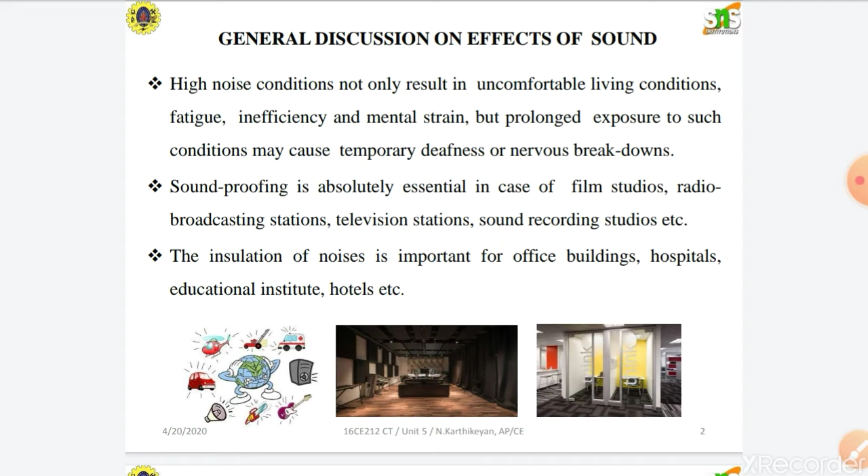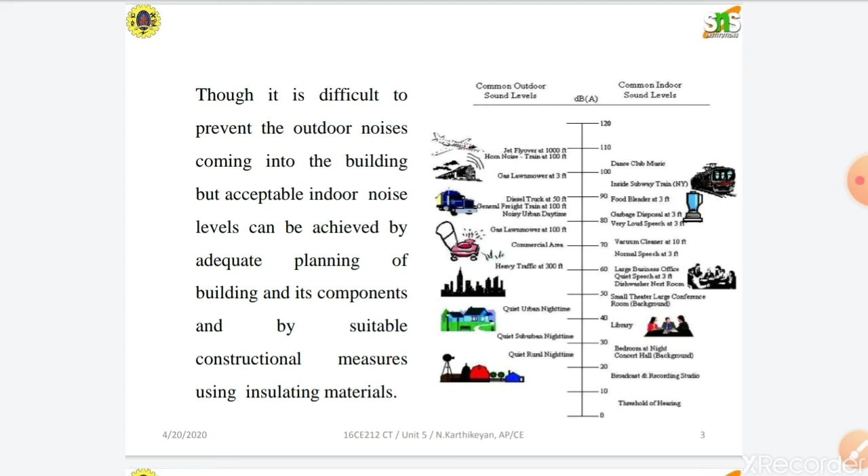That should be avoided. It is very difficult to prevent outdoor noise, but indoor noise can be achieved through adequate planning of components with suitable construction measures.

Noise is generally classified into two types: outdoor noise and indoor noise. Outdoor noise has its source of origin outside the room or building, such as traffic, railway, aeroplanes, loudspeakers, etc.

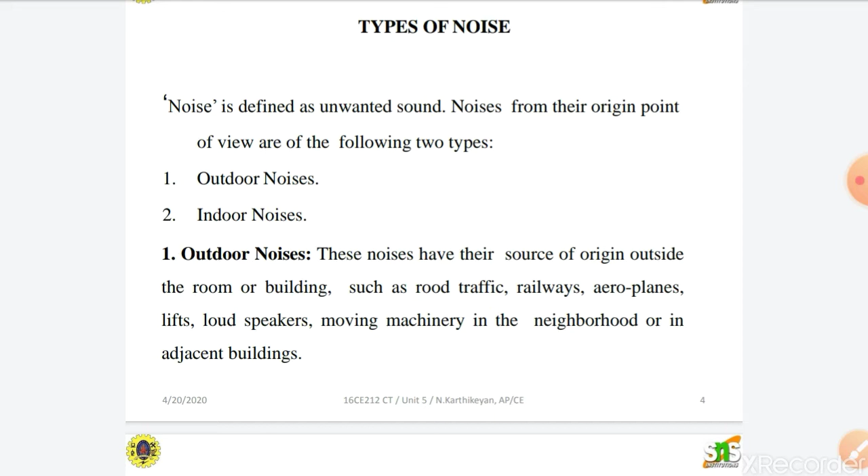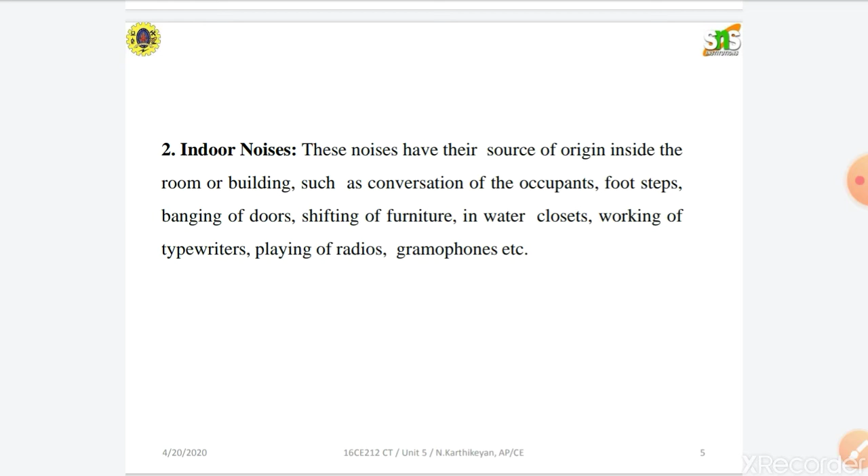The next one is indoor noise, coming from a source of origin inside the room or building itself. It may be due to occupants, footsteps, banging of doors, shifting of furniture, flushing of water closets, typewriting sounds, or even telephone ringing, which is also one type of interior noise.

These noises are also classified into two types based on the analysis of the sound insulation problem: airborne noise or sound, and structural borne noise or impact noise. Airborne noise is generated in the air and transmitted through air directly to the human ear.

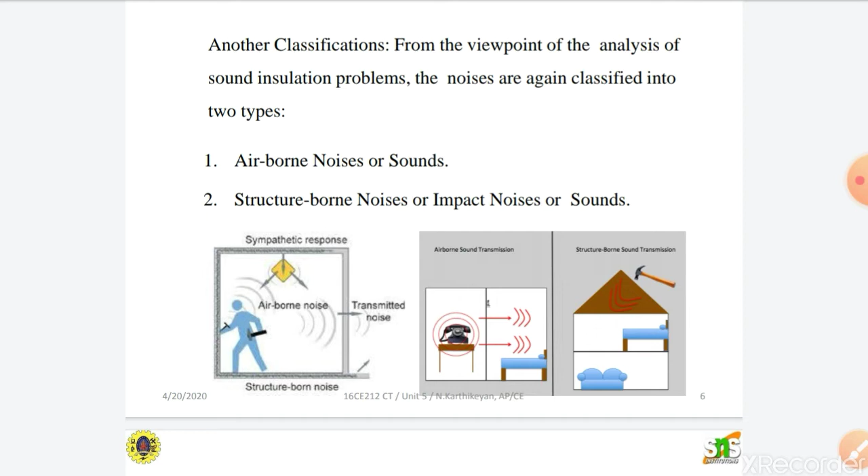This type of sound travels from one part to another through small gaps or openings, or by vibration of a portion of the wall or doors. The second one is structural borne noise, which originates and progresses in the building structure. It is caused by impact or transmitted as airborne noise.

We can see in the figure that airborne sound transmission is easily understood through the wall; while ringing the phone in some other room we can hear it in the bedroom itself, as the waves pass through porous media or partition walls. Either the neighbor hitting the wall, drilling the wall, putting a nail in, or hitting the wall with a hammer will create structural borne sound, which we can observe through vibration or transmission.

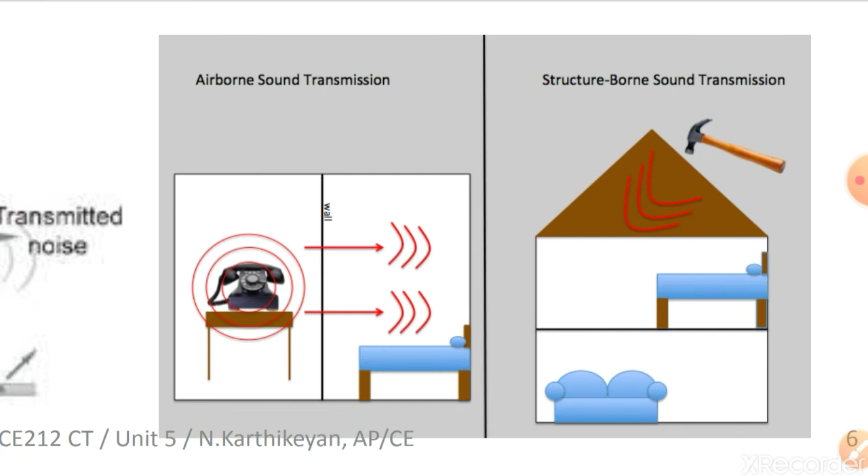So the transmission of noise can be classified into three types: through air, through structural members, and vibration of structural members. The first one, through air, is the most common and important.

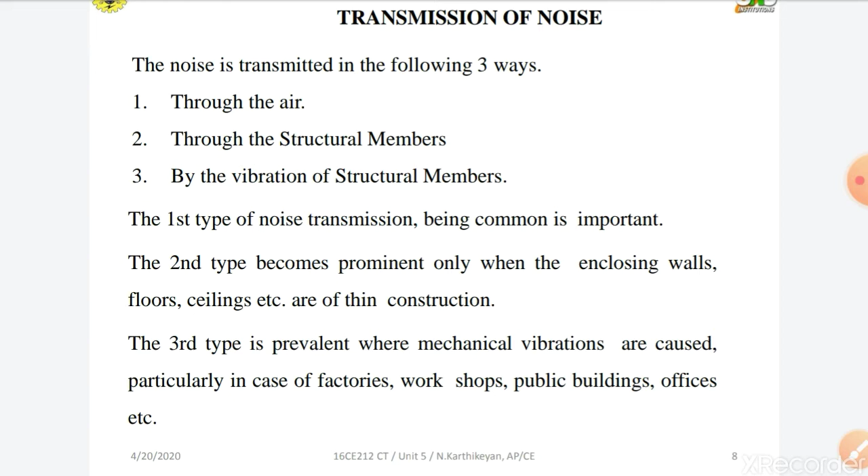The second one is through structural members, which becomes prominent only when the enclosing walls, floors, ceilings, etc. are of thin construction. In the case of office buildings or shops, we can prevent this. The third one is caused by mechanical vibrations, which may be prevented by thick wall construction.

We have already seen that sound insulation is entirely different from sound absorption. Sound absorption is the prevention of reflection of the sound waves, but sound insulation is the prevention of transmission of the sound.

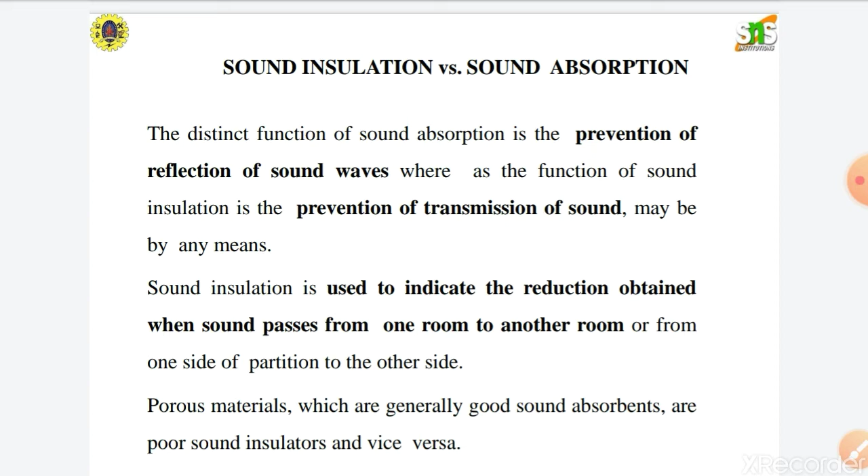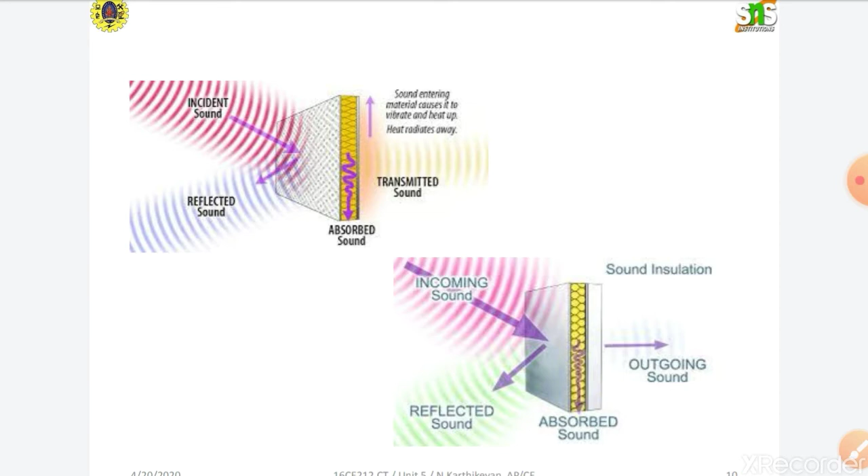If you use porous material for sound insulation or sound absorption, it is generally good in sound absorption but poor in sound insulation. If you use solid material, it is good in sound insulation but poor in sound absorption.

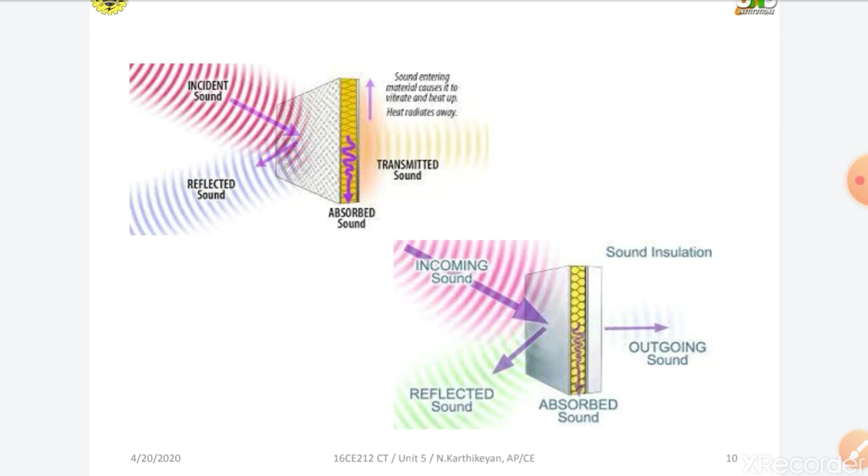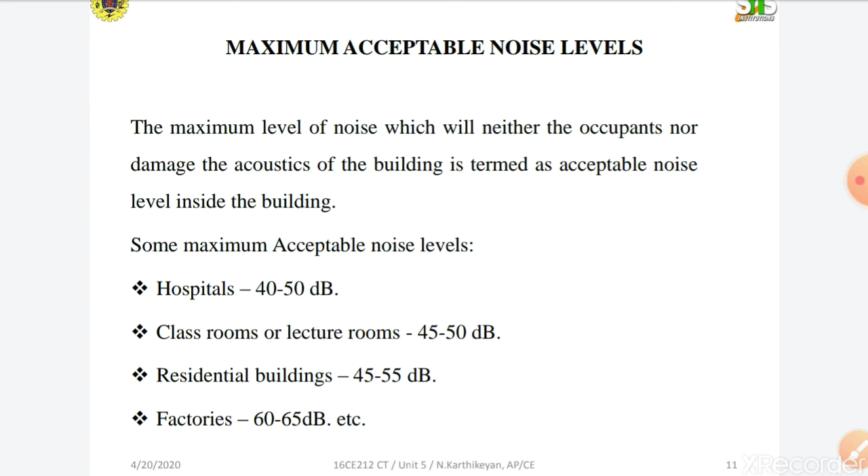The maximum acceptable noise level is described by authorities for any kind of occupants or building, and should have these limits. Maximum acceptable noise level for a hospital is 40 to 50 decibels. For classrooms, lecture rooms, or seminar halls, 45 to 50 decibels. For residential buildings, 45 to 55 decibels. For factories, a maximum of 60 to 65 decibels a day.

Noise control and sound insulation is based on Indian standards, which differ for different cases. As per Indian Code 1952 and 1962, limits for various kinds of buildings are given.

For houses or flats, the range is about 40 decibels. Between one room and another room in the same house or flat, it should be at 30 decibels. Between lecture rooms near to each other, it is 40 decibels. Between two wards in a hospital, it is about 30 decibels. For more details, we can refer to the above code.

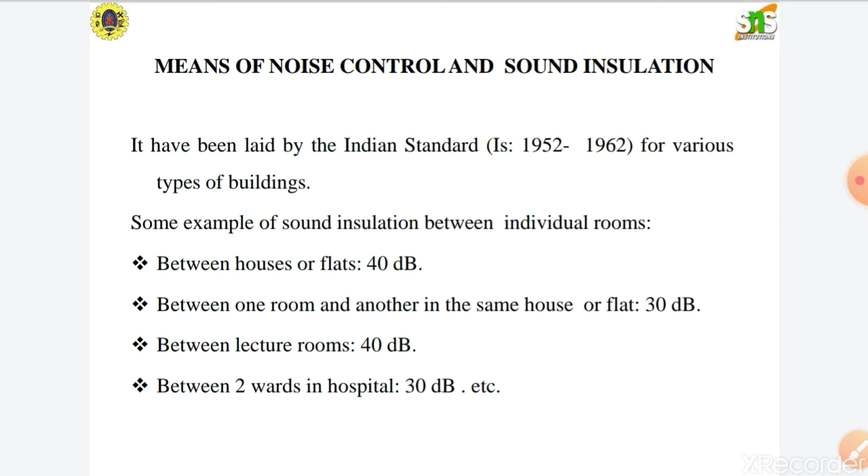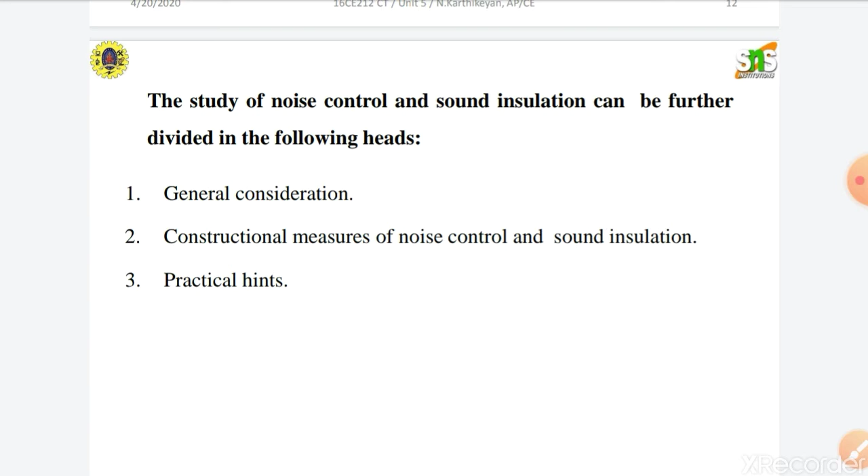The study of noise control and sound insulation can be further divided into the following heads: general consideration, constructional measures of noise control and sound insulation, and practical hints.

Under general considerations, we must first consider airborne noise and isolate it at the source itself. If we isolate airborne noise at the source itself, we will avoid the maximum amount of problems. For this purpose, we have the following methods.

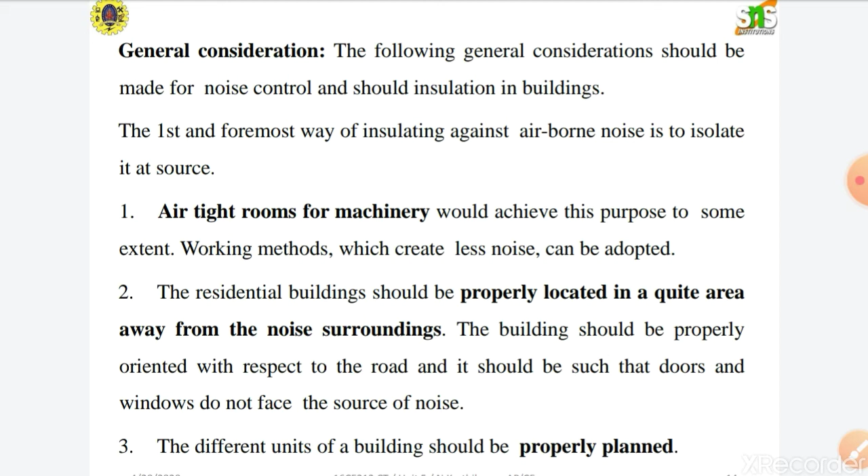The first method is an airtight room for machinery. If machinery creates more sound compared to others, it should be arrested at the source itself, through the working method, so that less noise is created. Regular maintenance and prevention of noise using springs, cork, or rubber should be done to avoid noise.

In the case of residential buildings, if properly located in a quiet area away from noisy surroundings, that is also good, since we are avoiding noise at the source. For this purpose, we should arrange the building considering its orientation with respect to the road, such that windows do not face the source of the noise. If we avoid providing doors or windows towards the source of noise, we can prevent the noise.

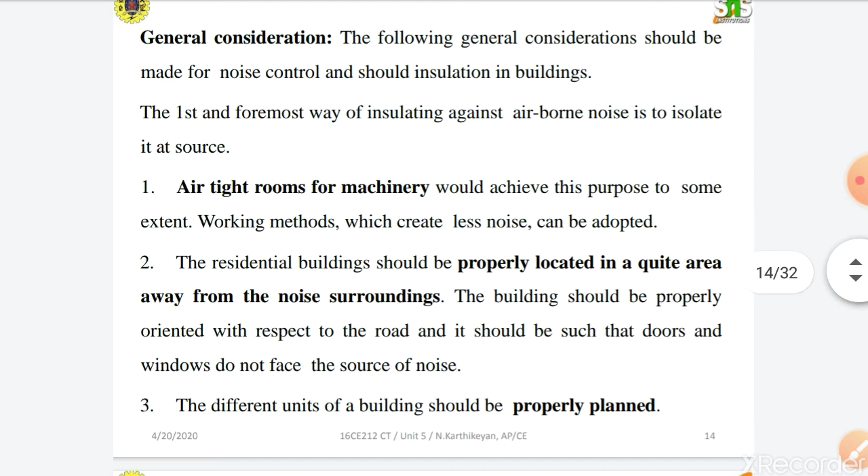If the building units are properly arranged or planned, we can achieve soundproof or sound insulated rooms. Provision of furnishing materials and lining of walls and ceilings can be done with air-filled materials, which will reduce the noise level to a great extent.

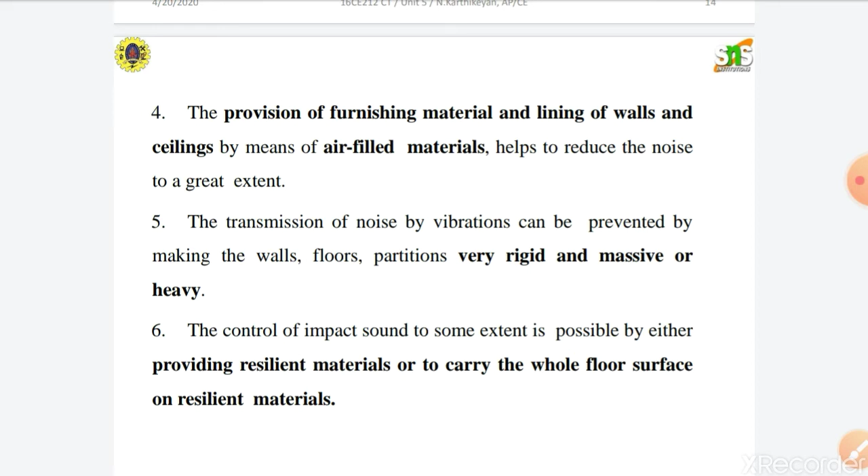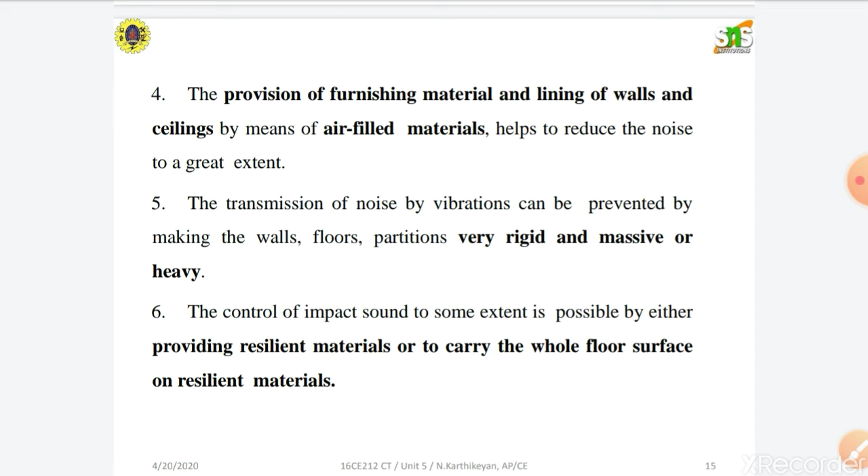Transmission of noise by vibrations can be prevented by thick walls, floors, and partition walls that are rigid and massive or heavy structures. The impact of sound can, to some extent, be reduced by providing resilient materials such as woolen materials. If the resilient material is thick, sound absorption is more; if it is very flexible and thin, the sound absorption or insulation is much less.

Structure-borne noise or sound can be prevented by introducing discontinuities in the path of vibrating waves, using sound absorbing material. We can also use personal protective devices such as earplugs and headphones, which can reduce noise by up to 20 to 30 decibels.

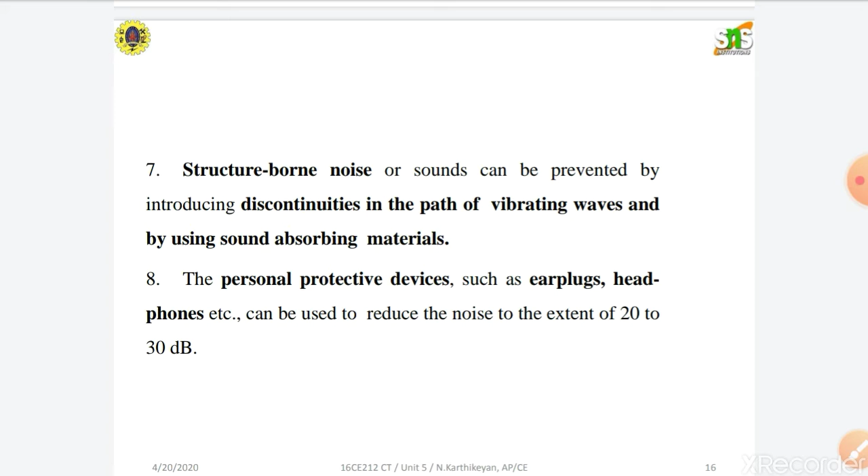But nowadays it is a fashion to use headphones to listen to songs, and this is also creating what we can call ear pollution. It will destroy the ear if used 24/7.

Some people are always hearing songs loudly—that causes external noise. We can control noise by the following ways.

We can control noise through walls and partitions, floors and ceilings, windows and doors, insulating sanitary fittings, and machine mounting or insulation of machineries. Let's see one by one.

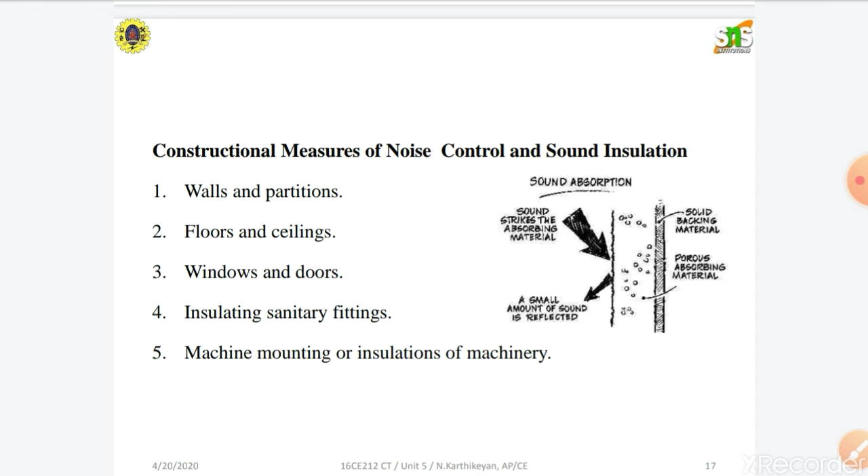The first one is walls and partitions. If the walls are rigid, massive or homogeneous partitions, they absorb the maximum amount and act as a sound insulation material.

If walls have partitions with porous material, it reduces a certain amount and transmits sound to the other side. If the wall is constructed with hollow and composite partition walls, or double wall construction, it is good for sound insulation—we can see that in the third figure.

The first figure shows rigid and massive homogeneous partitions. It absorbs the sound and reflects some amount, and some sound waves transmit to the opposite side, but only a small amount.

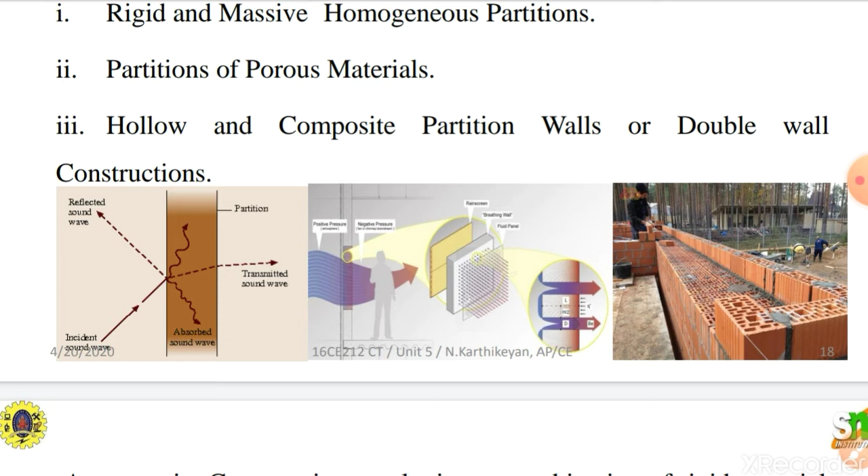The second figure shows partitions made of porous material. From the source to the end point, it reduces—the source is maximum, and at the end point it is minimum, as shown in the figure.

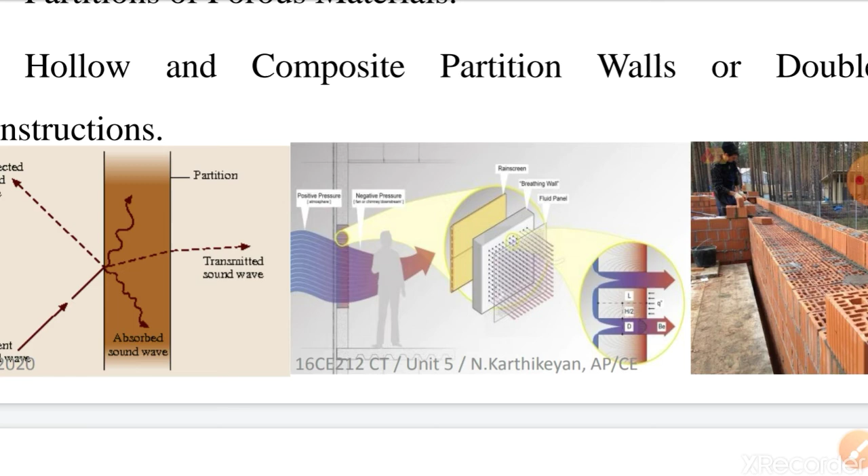The blue color shows that outside it is maximum, that is the positive pressure. While passing through the wall, which is constructed with porous material—good for sound absorption—some quantity is absorbed, and as it comes inside, it reduces in volume.

The third one shows a massive structure with hollow and composite partitions, like a thick wall with hollow blocks. It breaks the sound and acts as good sound insulation, as well as thermal insulation.

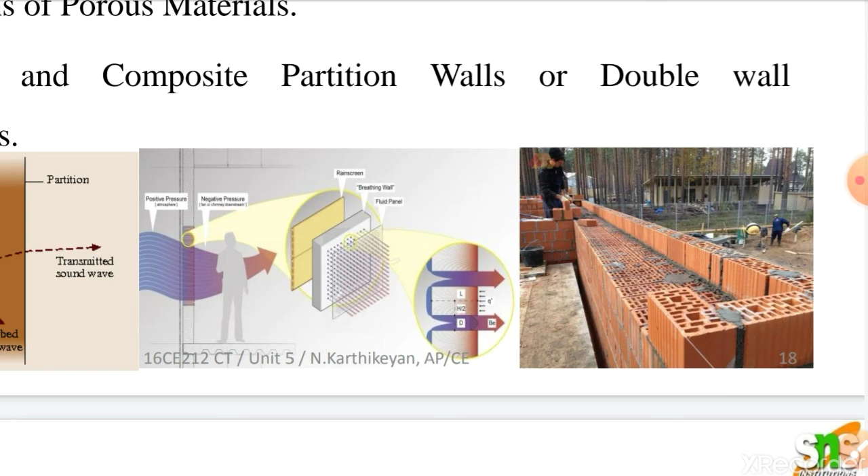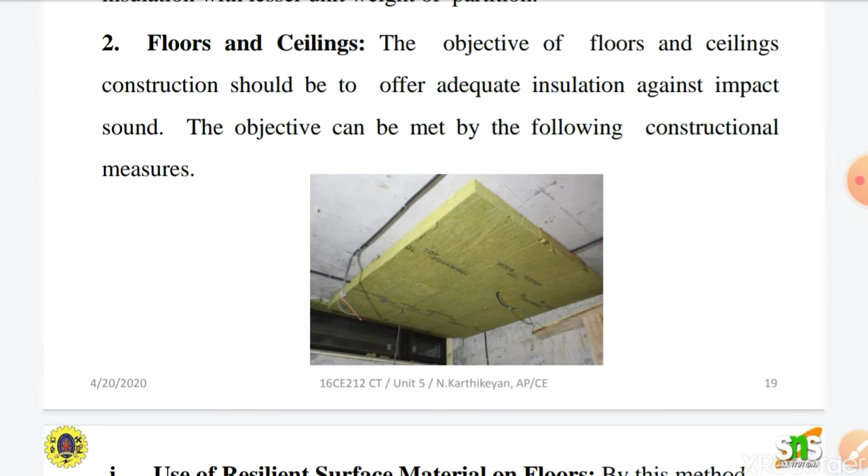Then we go with floors and ceilings. We can add sound insulating material to reduce the impact of sound, using resilient surface materials, which can extend the impact of noise reduction by 5 to 10 decibels.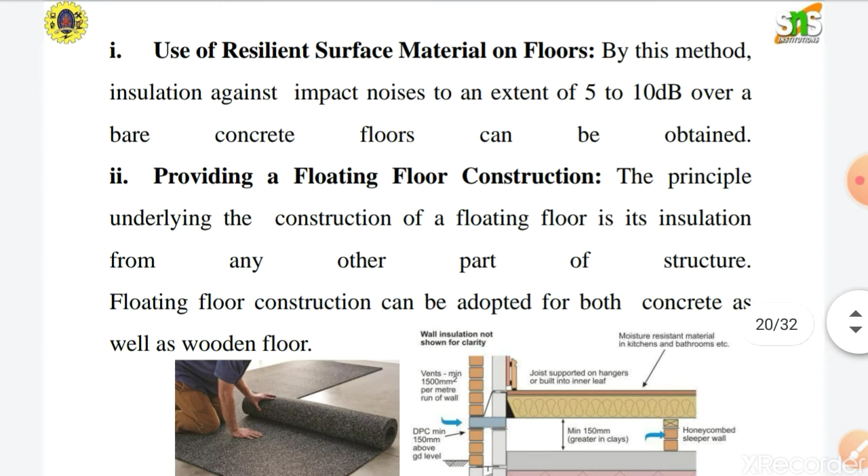Then providing floating construction, as we can see here. The resilient material, if applied or spread on the surface, absorbs some amount of sound and acts as good sound insulation.

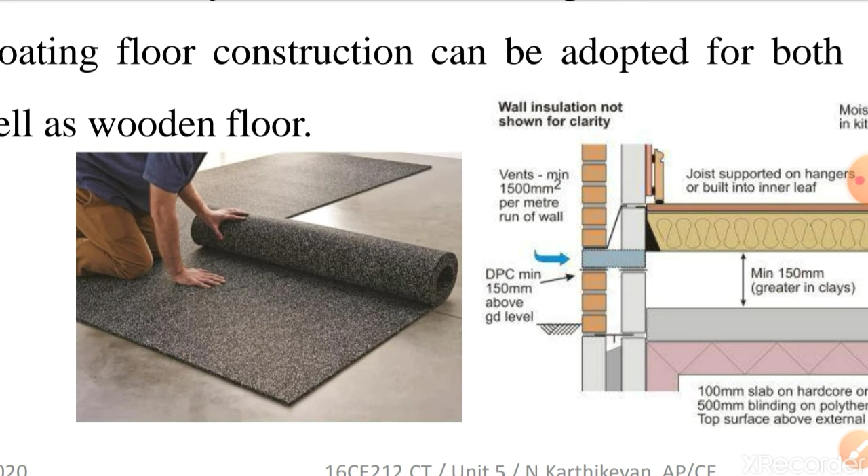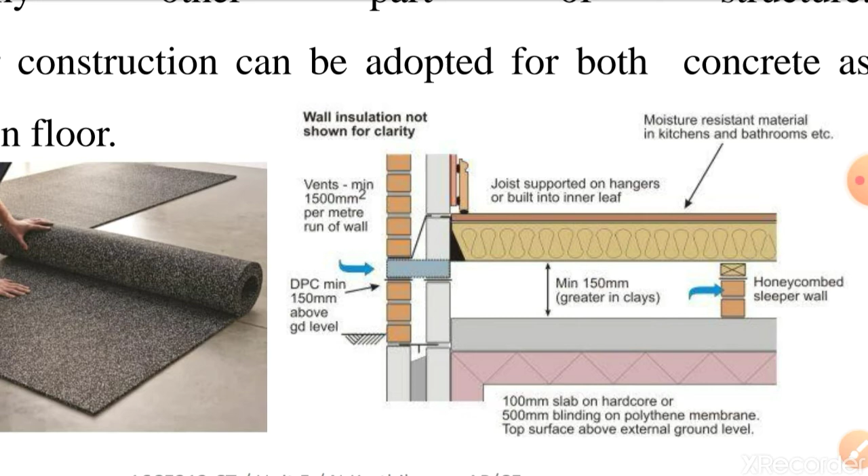If you go with floating floors, it's an additional floor where the space between the existing floor and the new floor is a minimum of 150 mm. This air gap can be filled with insulation materials, which absorb sound, absorb vibration, and prevent transmission to the next level.

Then concrete floors come in 5 types: concrete floor with floating concrete screed, concrete floating wood raft, and concrete floor with suspended ceiling and soft floor finish.

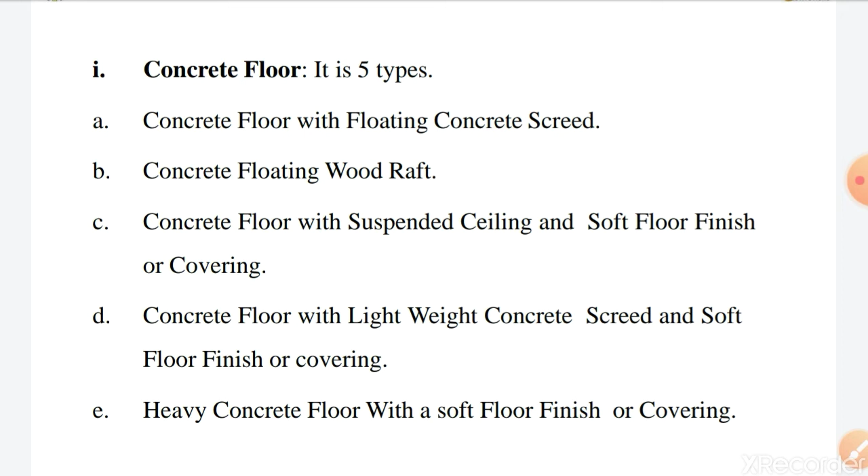Then concrete floor with lightweight aggregate concrete screed and soft floor finish, and heavy concrete floor with soft floor finish. These are the 5 categories we'll see one by one.

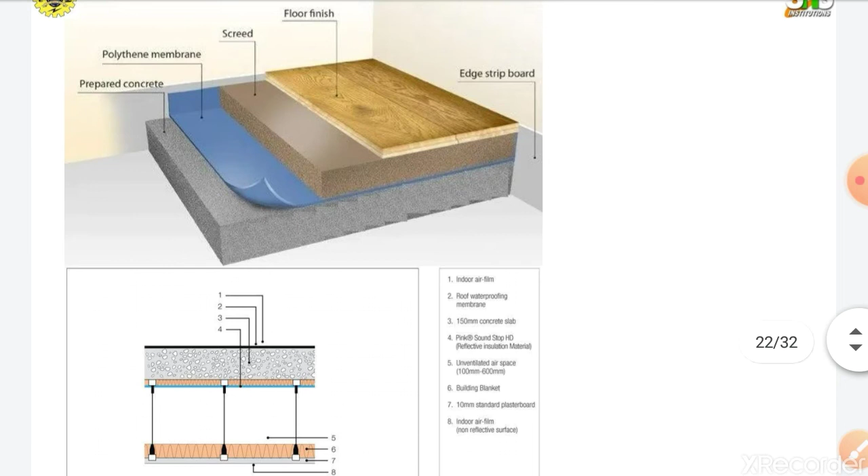This is the method to provide concrete floors. At the bottom, we prepare the existing concrete. Over that, we provide a polythene membrane, which acts as a damp proof course.

After that we do the screed, and above that the floor finish. This absorbs sound well and does not emit it—especially, the impact of sound will reduce.

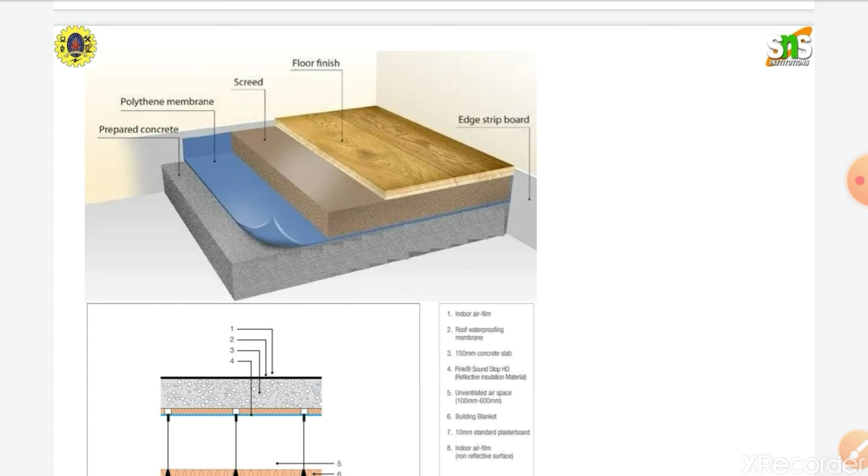The second one is the suspended floor. The existing floor has a roof, and from the bottom of the roof we are providing the floating roof.

For the floating roof, the first layer is indoor air film, then roof waterproofing membrane, then 150 mm concrete, then Pink Sound Stop HD reflective insulation material, with an overhanging portion.

From that, the fifth element is an unventilated airspace, around 100 to 600 mm, giving space which reduces the sound.

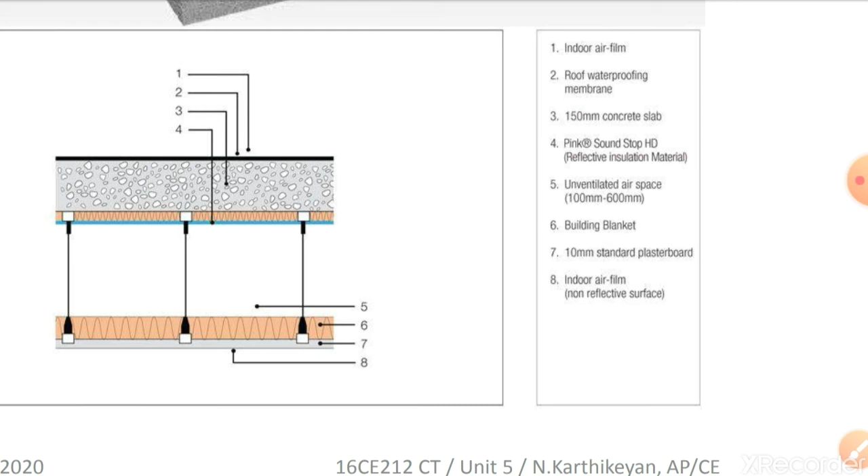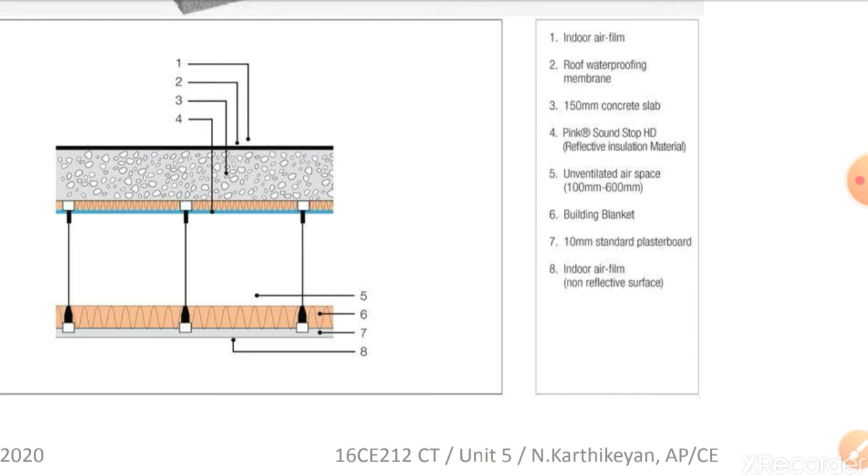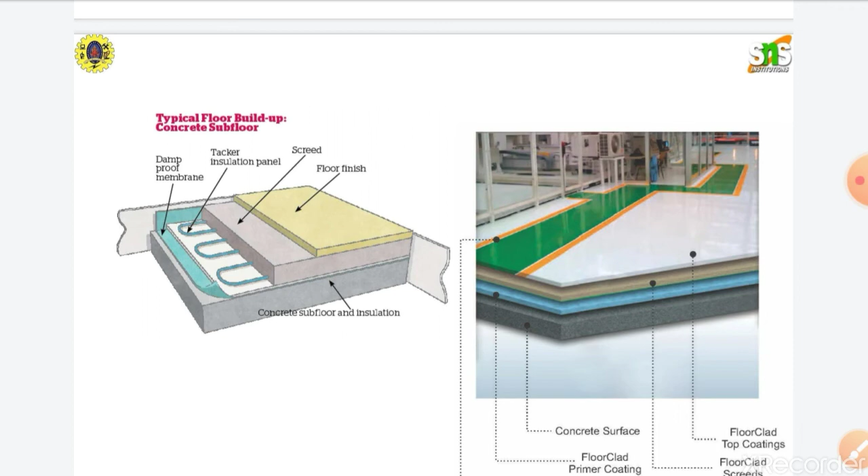Then building blankets made of wood, and 10 mm standard plaster boards, which are good for sound absorption. Then indoor air film provides a smooth surface while also reducing sound, as shown in these typical diagrams of various floor types.

Then in case of wooden floors, we can see two ways.

If the thickness is 10 centimeters or less, we can go with supporting walls. When supporting walls are 20 centimeters thick or more, we have to go with type 2.

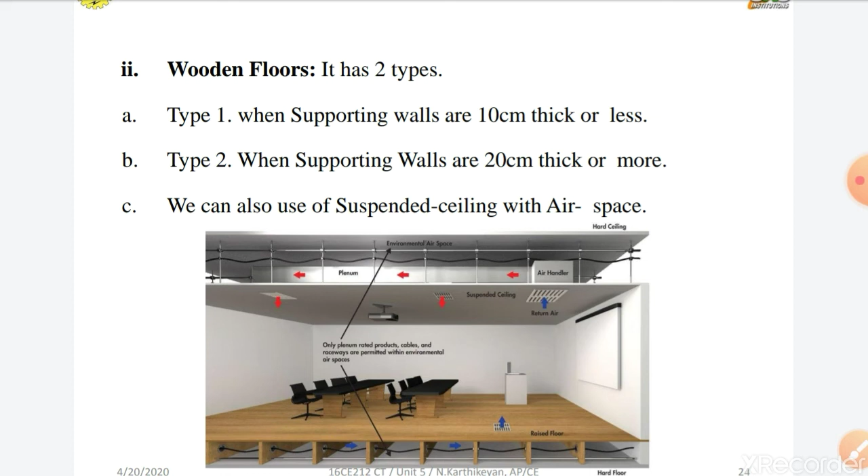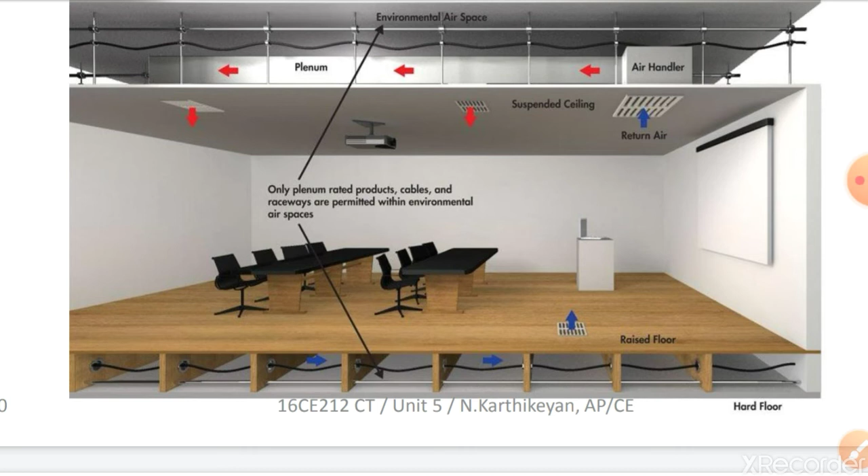We can also use a suspended ceiling with air space, as we can see in that figure. Air handler, environmental air space, everything will be there. Through this we can supply cool air to the building, like a centralized AC system.

In case of mahals, complexes, or convention centers, the top will be an asbestos sheet or AC sheet, which will absorb more heat. There should be sound insulation, as it will also absorb sound from the outside. It should be prevented from both sound and heat.

So in such a case we are achieving two purposes: one is sound insulation and one is heat insulation. The material is the same, but it will act for two purposes. Accordingly, we have to choose the material to reduce the construction cost.

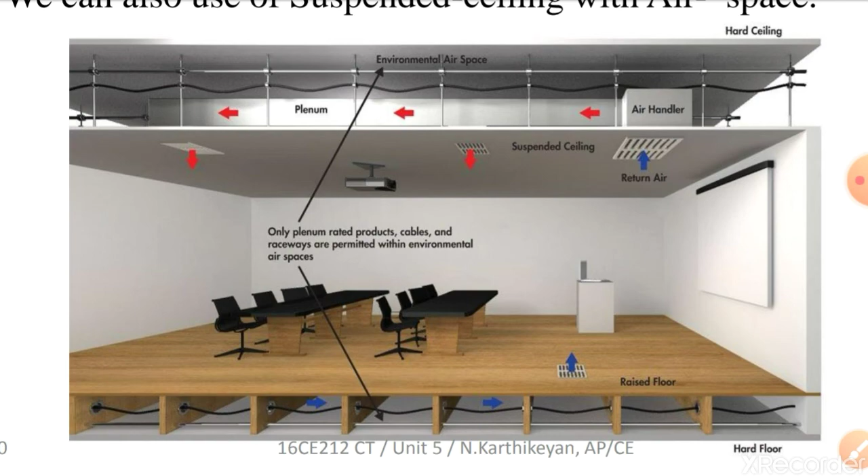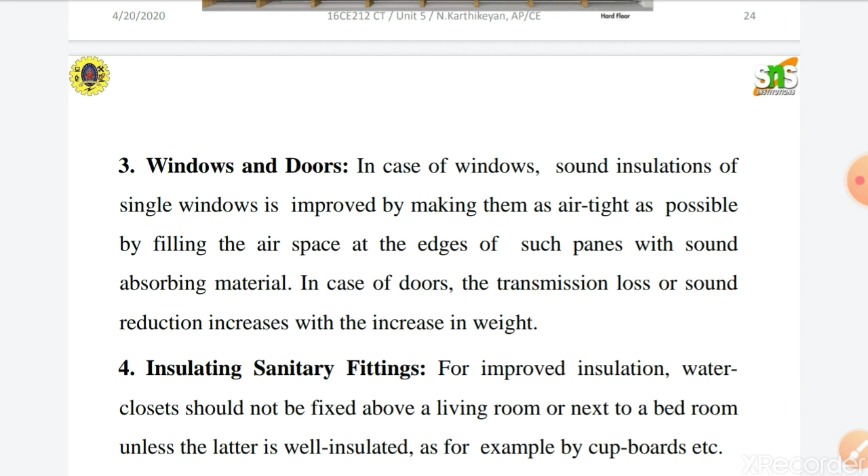Instead, if you go with double panel or triple panel glasses with air gaps, it will act as a good sound insulation.

For sanitary fittings with improved insulation, the water closet should not be fixed above the living room or next to the bedroom, as it will create sound. If it is provided, we have to cover it with wall insulation like cupboards, etc. This will not allow the sound to the outside.

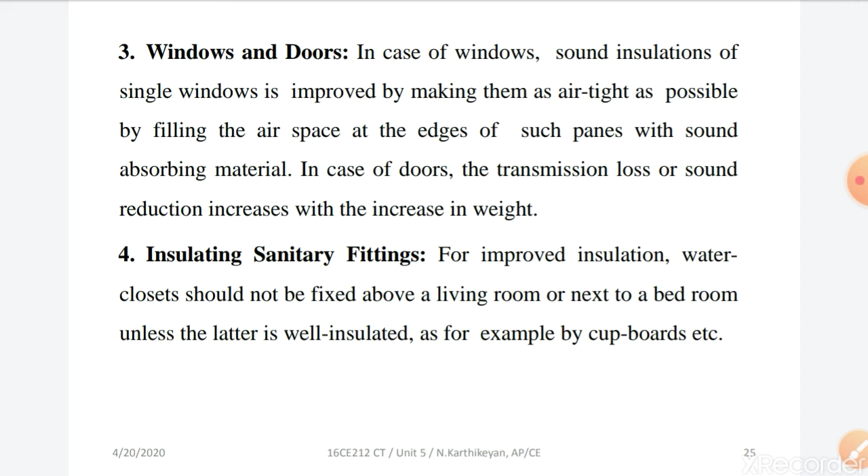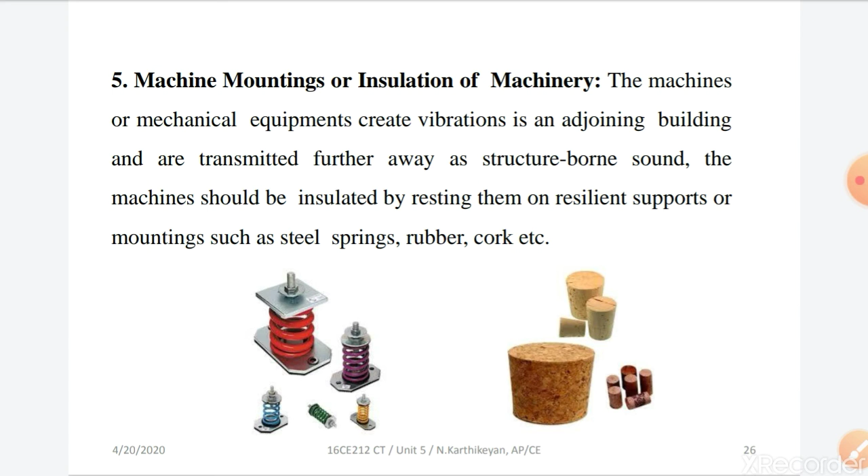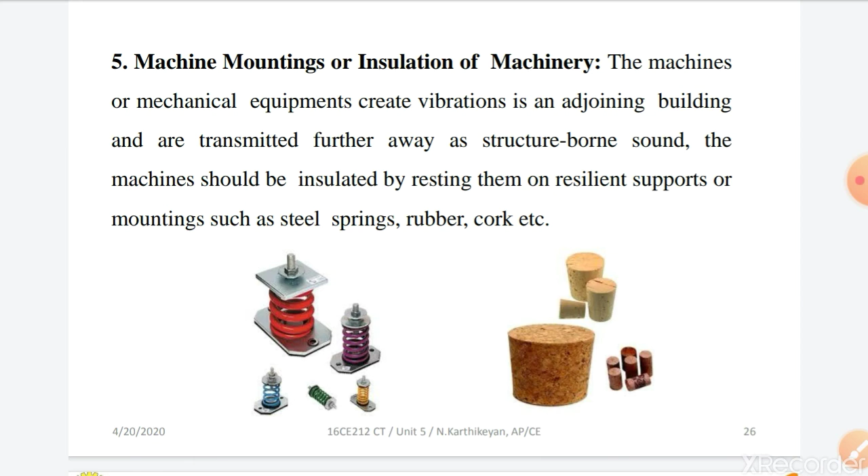In case of machine mountings or insulation of machinery, mechanical equipment creates vibrations that are transmitted to the adjacent building through structure-borne sounds. These machines should be insulated with resilient supports such as steel springs, rubber, or cork. This absorbs the sound, reduces the vibration, and prevents it from passing to another structure.

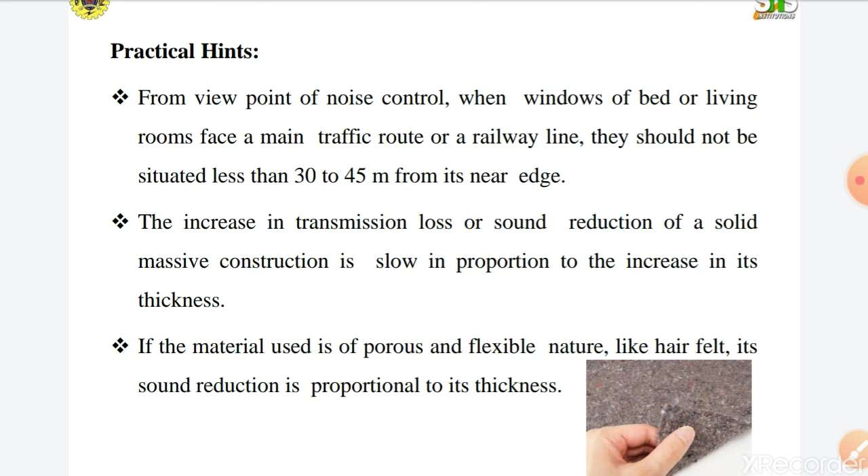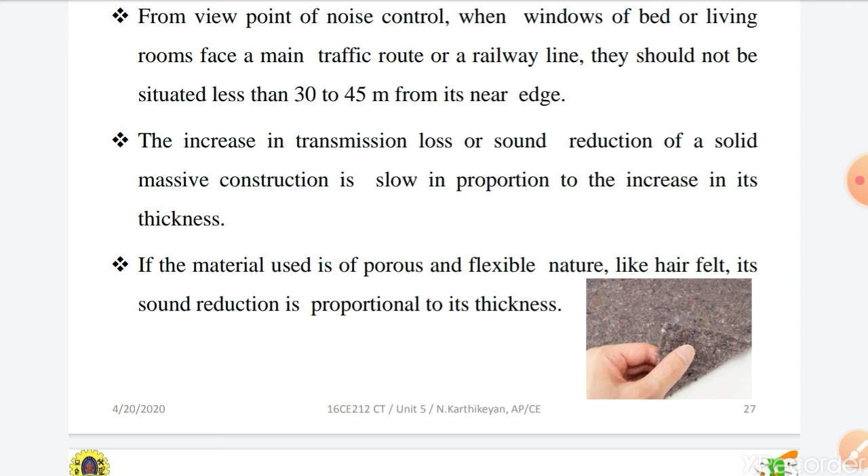To increase the transmission loss or sound reduction, solid massive construction is slow in proportion to increasing thickness. If you increase the thickness, we can reduce sound transmission. For porous and flexible materials like hair felt, the reduction is proportional to its thickness.

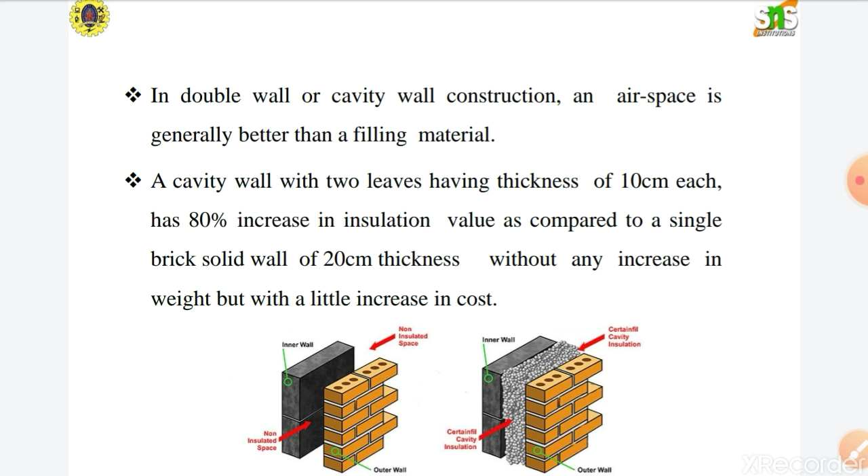If you go with a double wall or cavity wall construction, air space is generally better than filling material. A cavity wall with 10 centimeters each side has an 80% increase in sound insulation compared to a single solid brick wall of 20 centimeters thickness, without increasing the weight.

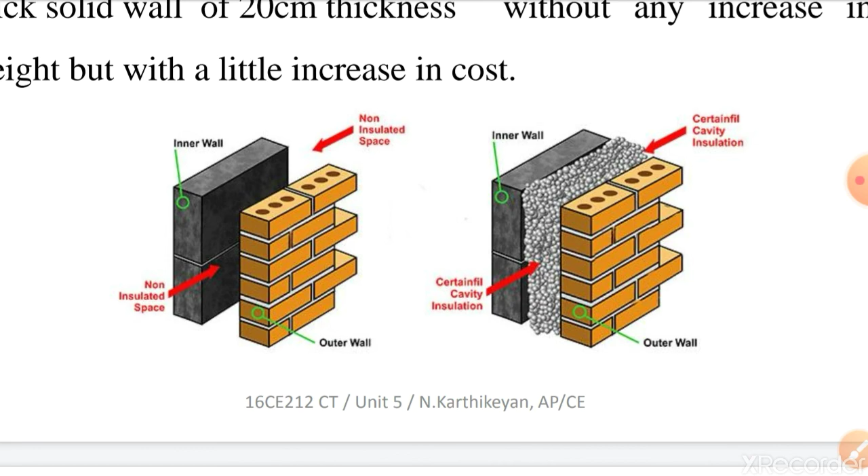Here we can see cavity walls. The first one is cavity walls without filler materials. The second one is cavity walls with filling materials, which is better for sound insulation.

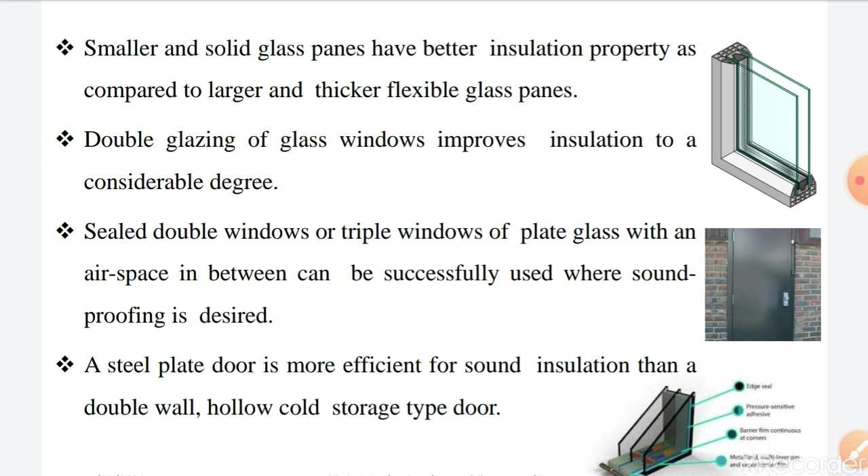Compared to all other doors, we can go with steel plate doors. It is more efficient for sound insulation compared to double wall hollow cold storage type doors.

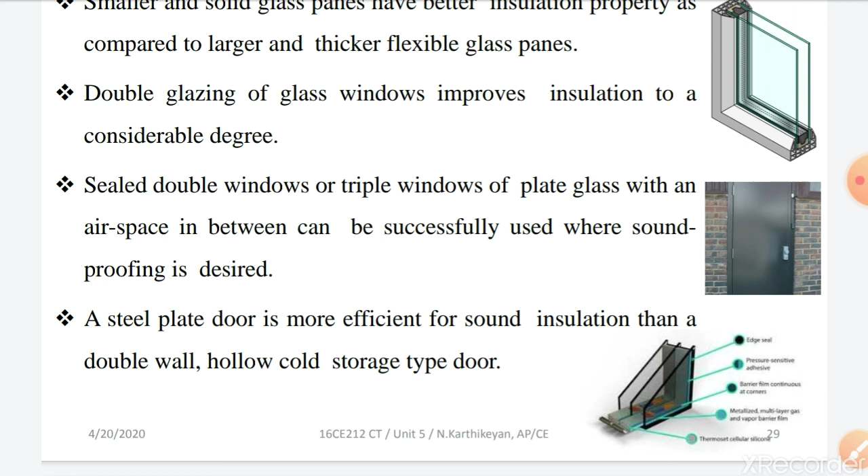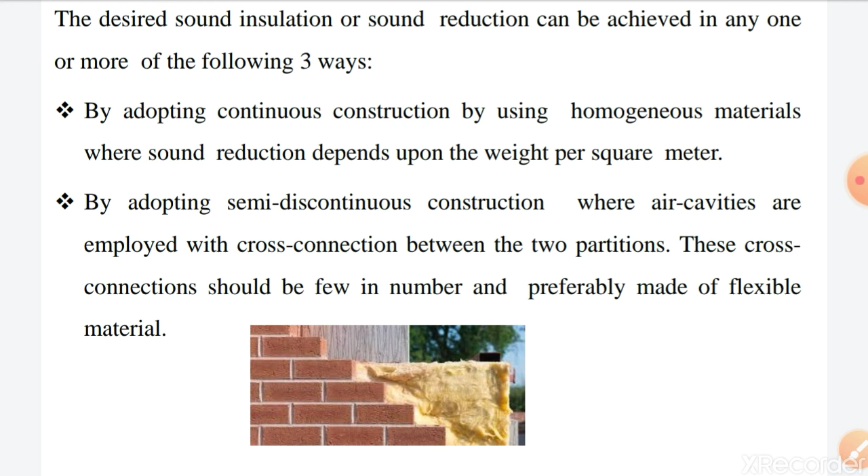By adopting fully discontinuous construction, there is complete discontinuity in the structure by means of air cavity or electro-acoustic material. This method is considered for meeting sound insulation requirements at a high order level, based on reasonable weight per square meter.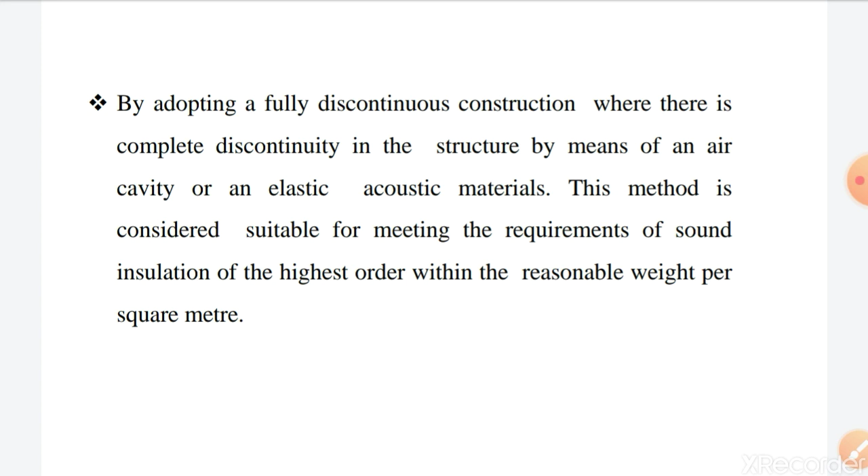Even solid walls, porous walls, and composite walls are all based on weight per square meter. With these above methods, we can considerably reduce sound from outside to inside, and from inside to inside itself. Thank you for watching these videos.